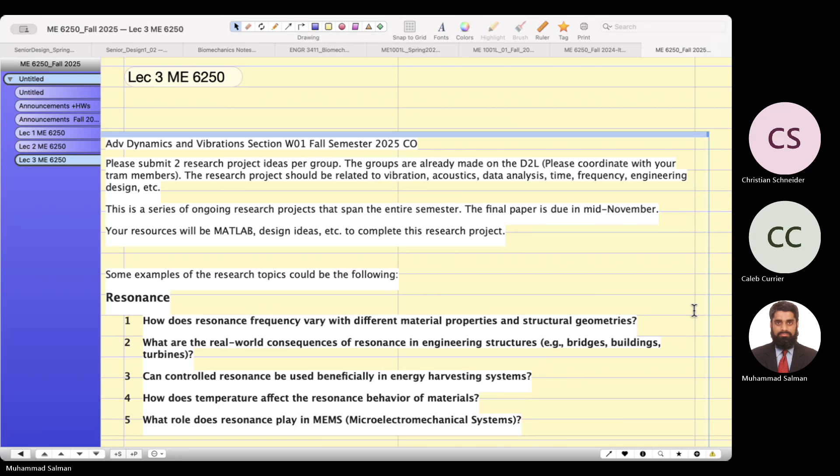So you have to come up with two research ideas per group. I have already made the groups on the D2L, so you should coordinate with your team members. The research project should be related to vibration, acoustics, data analysis, time, frequency, engineering, design, etc. It's a series of ongoing research projects that span the entire semester. The final paper is due mid-November.

This is the beginning of the research project. This first assignment is the start of all the coming assignments. In this first assignment, you will select a project. I gave some examples which are closely related to what other students did in the past.

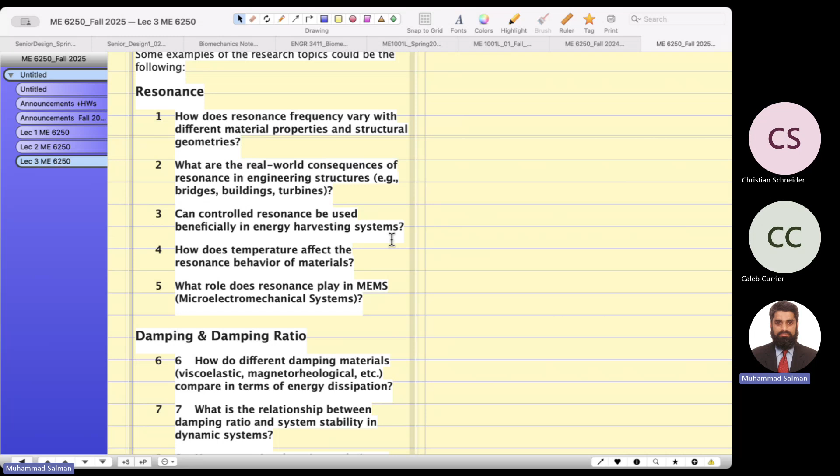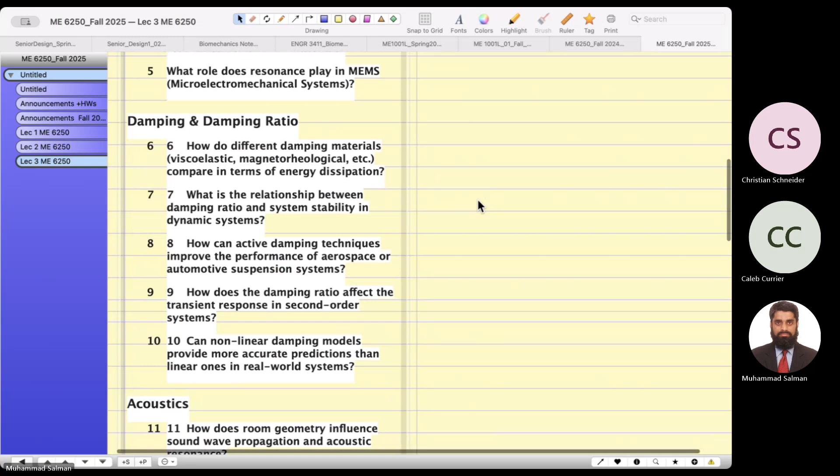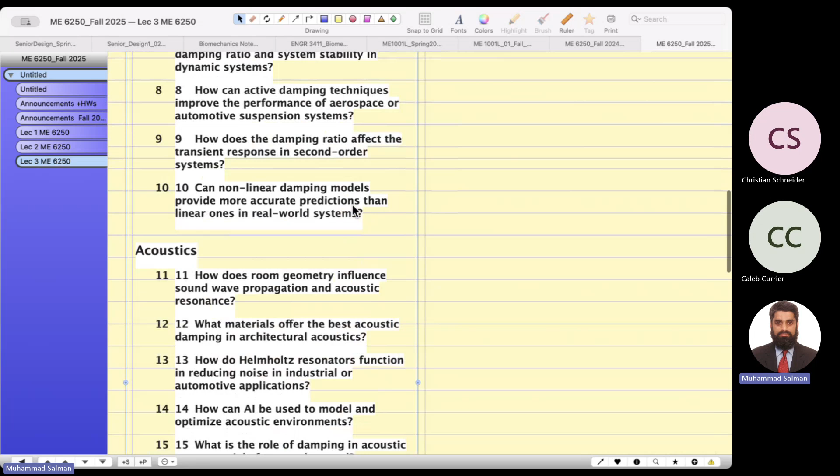For example, resonance: how does resonance frequency vary with different material properties and structural geometries? And damping ratio. Actually these are not two numbers, just one number. Somehow the software is automatically giving another. But acoustics, vibration analysis...

So I would suggest you go home and talk to your team members about which selection you prefer. You might have your own idea too, you have freedom to choose which paper you want to work on. Can you do that at home this week, and coordinate with your team? I think you are working together with another guy.

He's not here for some reason, but you three are working together. I have made a group of students. Can you see this on D2L, that you are grouped together? So you can see it on the D2L.

No, can you see it? If you go to the D2L... I think under 'others' you see the groups. Can you go there? Do you see the tab called 'Other' and the groups? So you found your group members there.

Okay, now it's not difficult. You come up with two ideas and we will discuss together. But I would suggest, when you submit this homework, give like a 90% weightage to idea number one and 80% weightage to idea number two -- this will be your preference. Then I'll give you my feedback, because with 4 months, or really 3.5 months left, that's the time span. I want you to select a project which is not too difficult and not too easy, so it covers the whole semester easily.

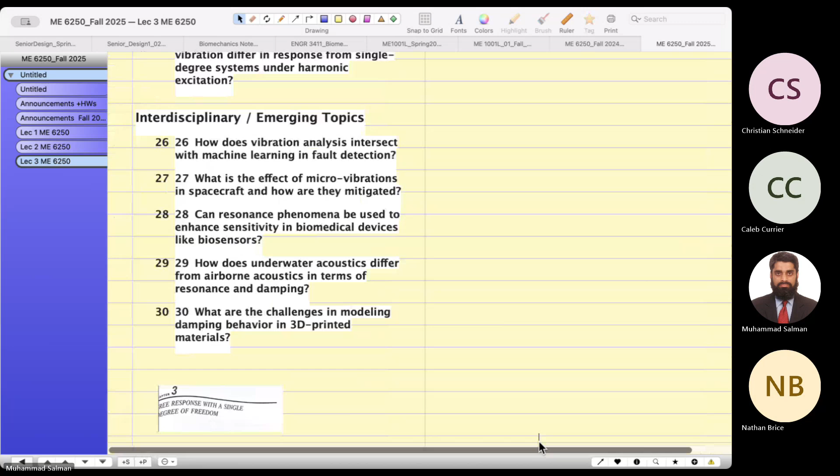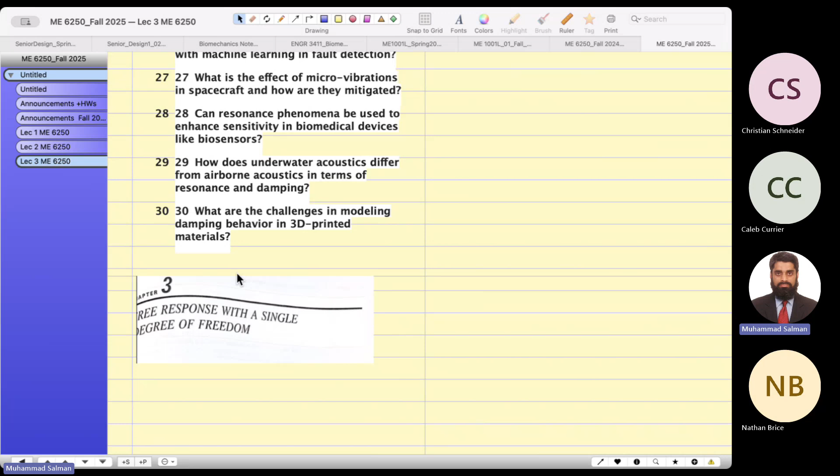Free response with a single degree of freedom. We will study multiple degrees of freedom later down the road, but today we will study the single degree of freedom.

Okay, I'm giving some examples. Let's start from the... project outline, the chapter outline is here. First order response -- let me give you an example.

If you see a problem, a physical system, how do you go from a physical system to mathematical equations? Let me give you one example.

Suppose this is a block of mass, and this is on a table. It has friction, so force. When this is a block of mass and you apply a force in this direction, what will happen? It will start moving to the right, and there is friction, which we call the damping coefficient. Friction is known as the damping coefficient.

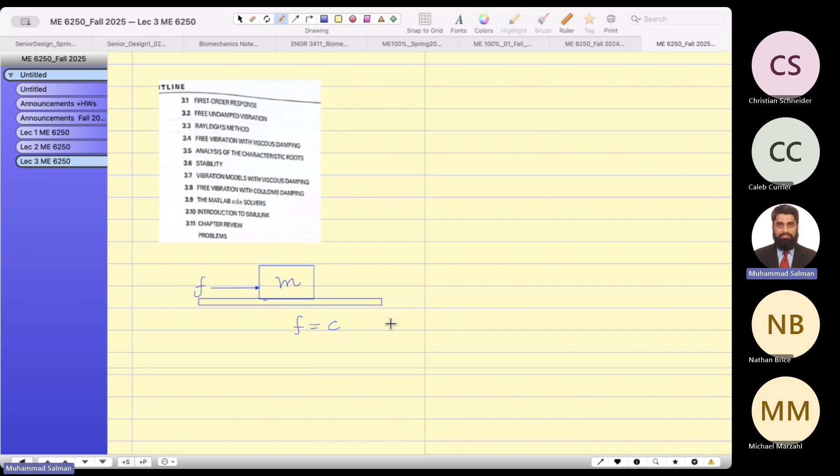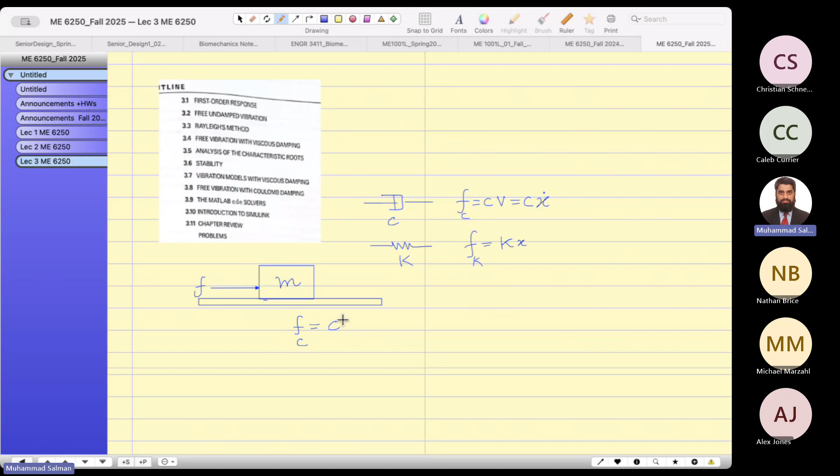Agreed? So what I'm going to show you is that the friction force due to damping acts like viscous damping. Agreed? So let me write it like this: cv. For the moment, let's write it in terms of variable v. So now it's moving in this direction.

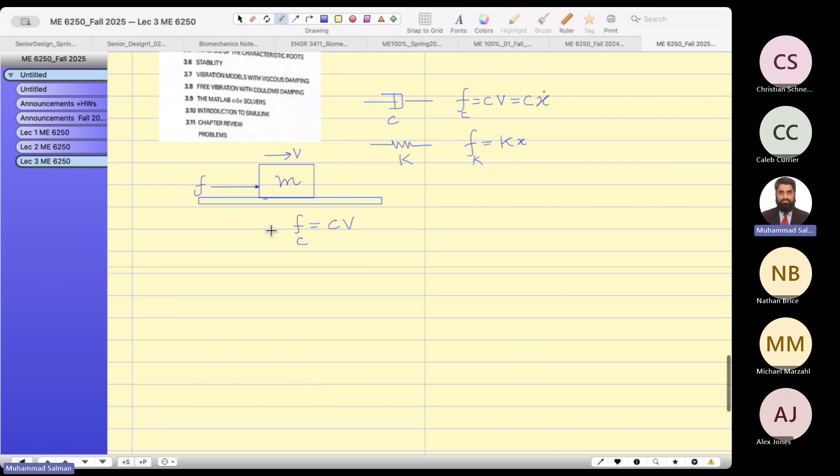Now, Newton's second law. When you are deriving the equation of motion, you start with Newton's second law, which states all the forces on the left hand side are equal to mass times acceleration. So mass times acceleration -- since it's in terms of variable velocity, can I write it down like this?

Now on the left hand side, I'm going to show you. This is my positive direction, because I'm assuming that my right coordinate is positive. X to the right is positive.

Now let me show you the direction of the damping force. Would it be in the direction of motion or opposite to the direction of motion? Opposite, because it is resistance. Viscous damping is resisting, so I can write down a negative c.

Why am I writing this? Because it is opposite. So this is applied force minus friction force equals to mass times acceleration. You see my point, guys?

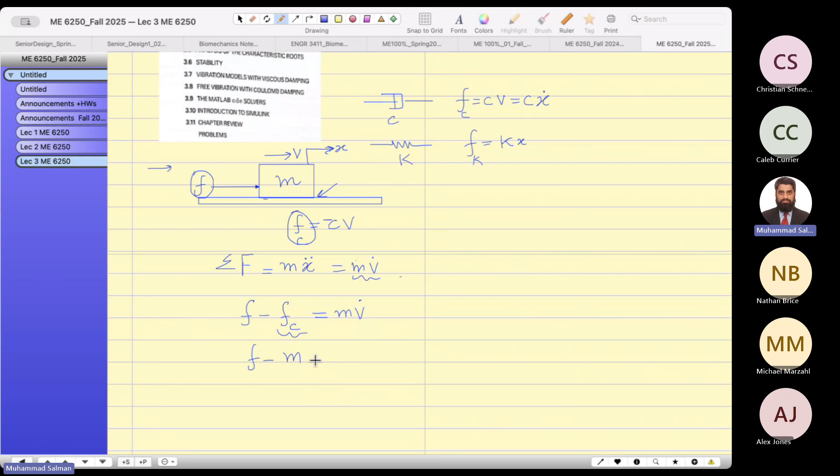Now if I rearrange everything, can I write down like this? M... let me write the first step, then I will show you. Can I plug in this formula in place of F sub C? I can do that: F minus C times V equals to mv dot.

Now if I rearrange it, I can rewrite here the acceleration term, the first order derivative, velocity term, and then equals force. So it is the differential equation of motion, first order.

Now, according to our knowledge which we already possess, we know there's a standard form in the first order equation. Let me write down the standard form here. Standard form of first order differential equation of motion: time constant times... some constant here. So maybe I can write down here just like this.

And the coefficient for this velocity, the second term, is 1. This coefficient is 1, and this is known as the time constant.

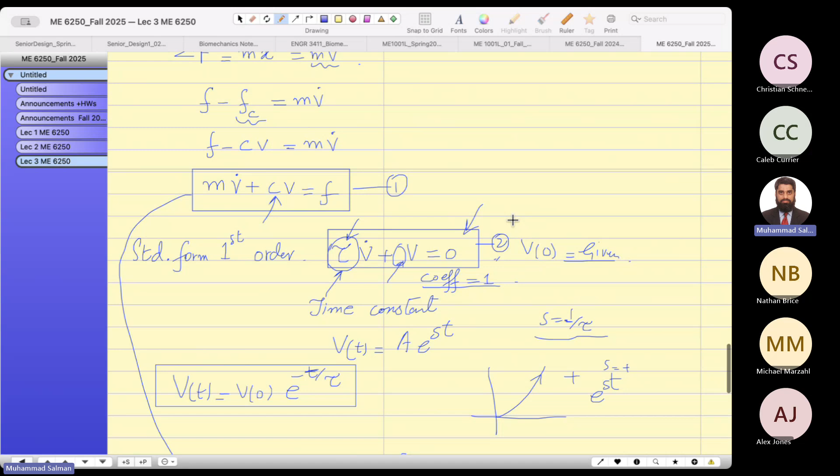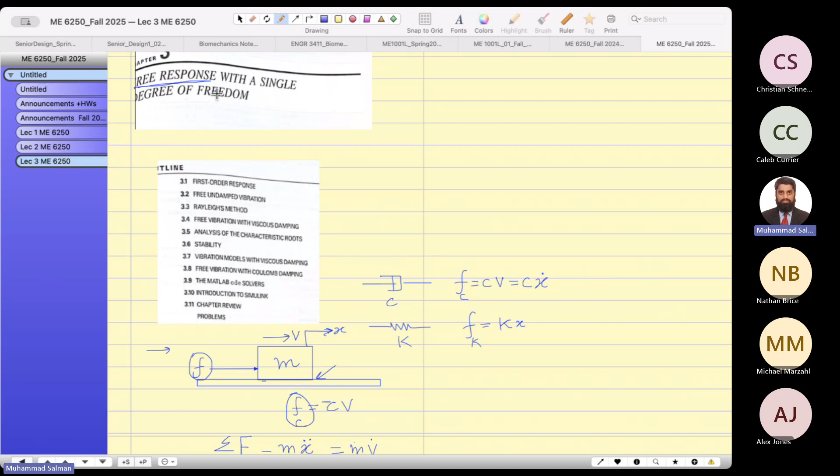Now on the right hand side, this is a force response. You see the standard homogeneous equation, which says the right hand side is a free response because our focus is on the free response. We will study the forced response later. You have to make the right hand side equal to 0 in order to apply this solution. This solution is only applicable when the right hand side equals 0.

If it is not 0, it's known as steady state response, which you will study later. Steady state response is different than the free response. Free response is where the right hand side is 0, you just give initial condition. That's why I wrote down V sub 0.

Suppose you move a spring, the mass up until like 1 centimeter, and just leave it, it will start to come back, oscillate, and stay there. So it's a free response, and we can apply the equation.

So let me write down this equation like this. Can I apply this? Velocity equals to V sub 0, or V0, times e to the, what is the time constant? The coefficient of velocity dot, the first order term, that is the time constant. So can I write down T over M over C? And if you rewrite M over C, can I write down e to the negative C over M times T?

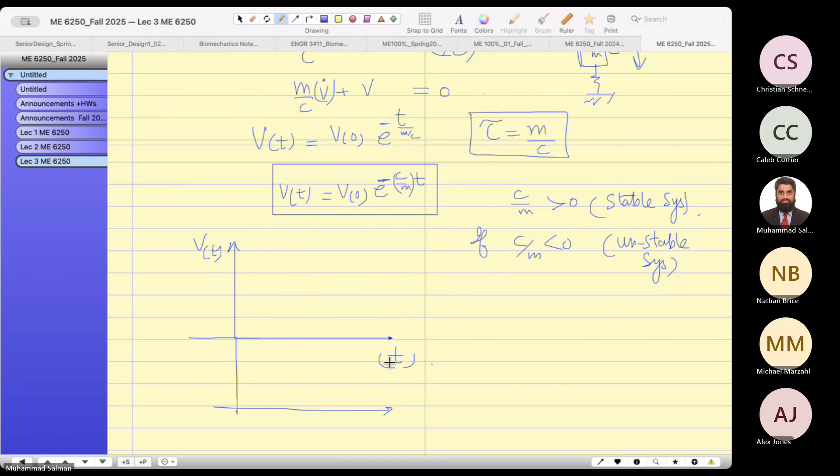And how do you draw the unstable system? Let me show you graphically. Over here, velocity here and time here. I'm gonna draw two plots. This is graph number 1, and this is graph number 2.

Graph number 1. Which one is a stable graph? Number 2.

You remember in the last lecture, I talked about the constant. I drew this plot to show you the time if the system comes to 0 position. If you give initial condition, maybe 10 meters or 10 meters per second velocity to some motor, whatever it is, it comes to rest after some time.

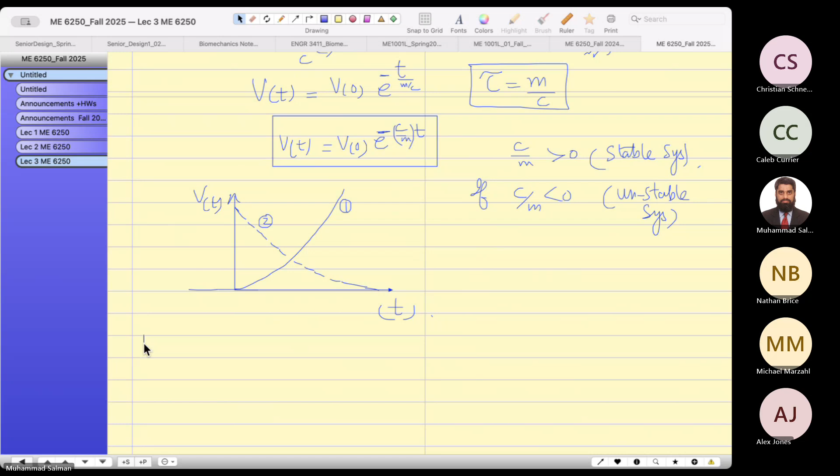We will come back to chapter 2 later. I want to finish a little bit of the vibrations and come back to dynamics a little later.

So look, have you understood this plot? You just have to graphically understand it. This is growing exponentially, it's unstable. And when C over M is 0, it's a constant value. And when it's greater than 0, positive, it comes back to the mean position.

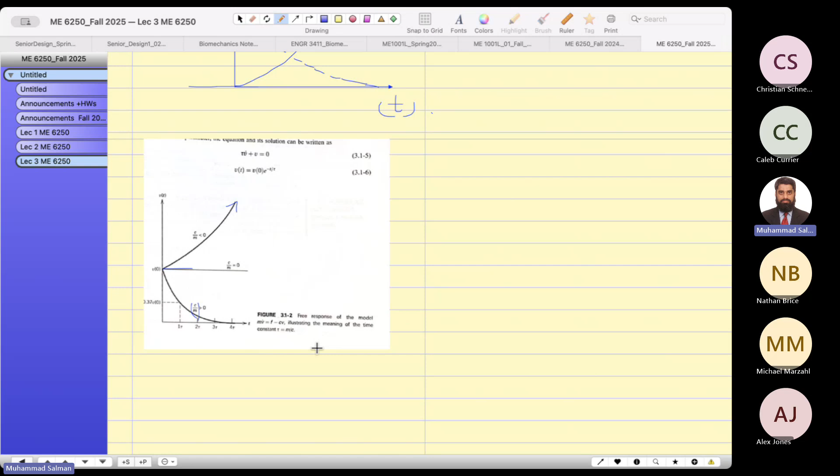I want to show you one more thing: if you take this equation of motion, which is this one.

Do you know, I think there is a Laplace transform table. Do you know about Laplace transform? Laplace table, form sheet.

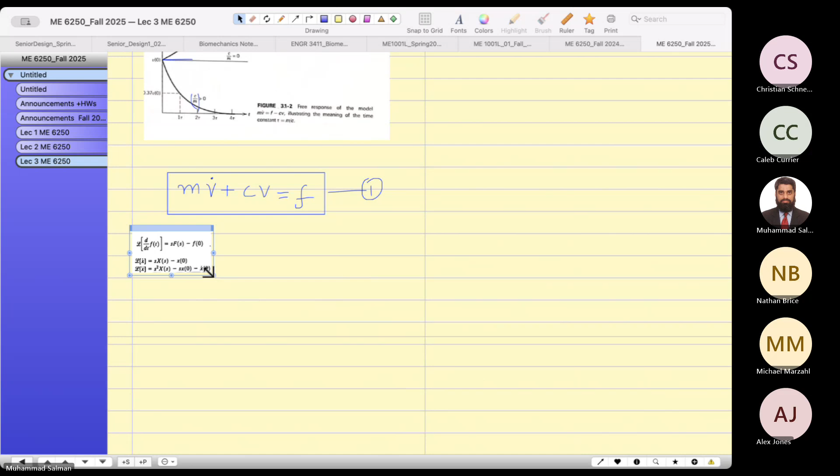This is the Laplace transform of the first order derivative, and the second order derivative. You will study this Laplace transform in detail in chapter 5.

Look, this is the model. And I explained that when you are dragging a mass, it creates some friction that is a negative damping coefficient. So that's why I'm drawing that in the form of an equation.

Now look, over here, I want to apply this, the Laplace transform, keeping the right hand side as 0. And what is the Laplace transform? Initial conditions are assumed. I'll show you the initial condition in a bit.

This is MS. Can I write MS, big V, S domain, C, big V, S? So then you have this initial condition. For this one, I can write down negative initial condition as written like this. Now look over here, so V of S in the S domain is outside the parentheses, MS plus C.

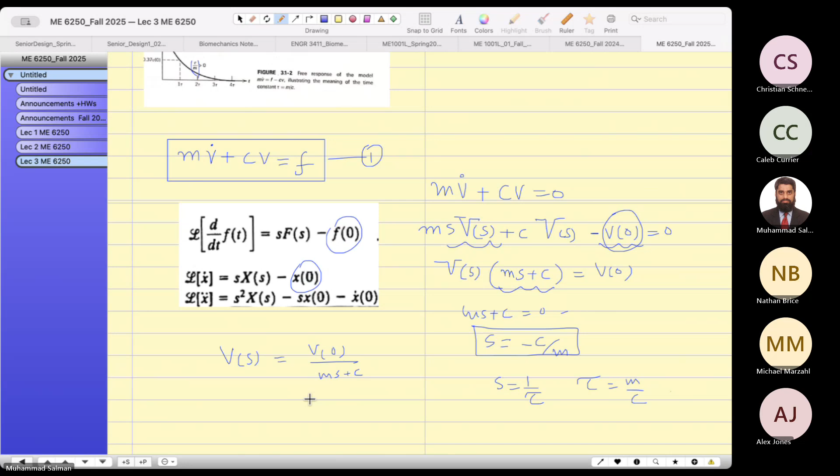So V of S... yes. Look, this is already there. This is the initial condition. It's there because I just added the big V's together. So now, look, can I write down here like this? V sub 0, V of 0, M is outside, S plus C over M.

So now if you take the inverse Laplace, V of t equals V of 0, e to the negative C over M t.

Because we know that the inverse Laplace transform of this term equals e to the negative at. You might have studied this earlier, but you can revise it. Whatever method you use, you get the same answer.

So let me show you one question. Let's do one question together. I think this is our...

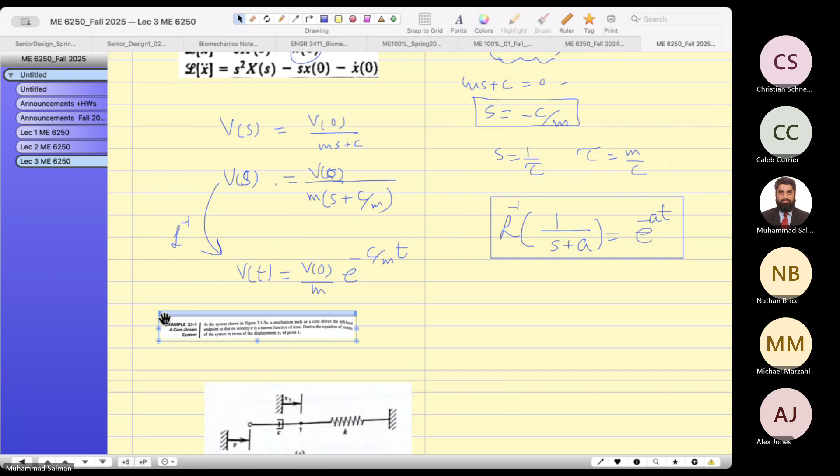In the figure 3.1-3a, by the way, this is figure 3.1-3a. Okay.

Mechanisms such as a cam drive the left hand endpoint. So this is the endpoint and it keeps going forward and backward as a function of time. Derive the equation of motion of the system in terms of the displacement x1.

So we have to derive. Does it say to find the solution? Okay, we will find the solution. I will find out what is the solution of this derivative. So let's do it together.

Okay, this is when you see such a sign in many example problems, you will see this. It is nothing but the displacement degree of freedom. This node is moving with a displacement, the coordinate is x1. It's starting from 0, and at this moment going to the right will be positive. And this is another degree of freedom.

So some books don't put it this way, some books write it on top and say degree 1, and this is degree 2. So it depends, it's not a big deal whether you write it this way or the other way, but these are the degrees of freedom, or the generalized coordinates.

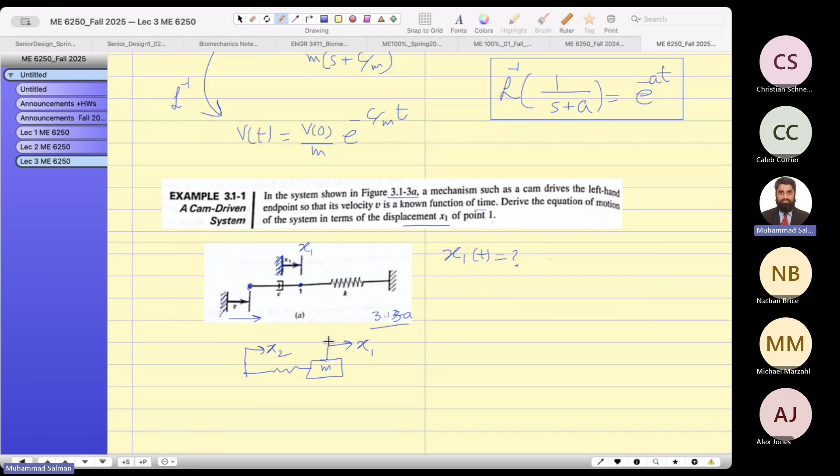You will also study generalized coordinates, which completely define the motion of the system, later down the road. So let me show you. I want to show you what the equation of motion is.

So can I take this node, which has this motion to the right? It's a nodal mass, meaning mass is 0. Then the spring will exert, push this to the left. So what is the force due to the spring?

Minus kx. And when this node moves to the right, the damper will also bring it to the left. And the damping force is c times...

Now here comes the trick part. Look, this end is moving, and this end is also moving. So how will you find the net velocity? You have to find the difference.

So the way I will do it: I will take the coordinate which is for the nodal coordinate, the mass coordinate, and write that down first to be consistent. In future, when considering the mass, you should write down its coordinate first. So what is the coordinate of the nodal mass? X1. So what is the velocity? X1 dot will come first, then comes the other end's velocity.

What is the velocity given in the question? V, it's the symbolic expression. Can I write down negative V? So this is the, and negative sign — why do I write down a negative sign? Because my coordinate is positive to the right.

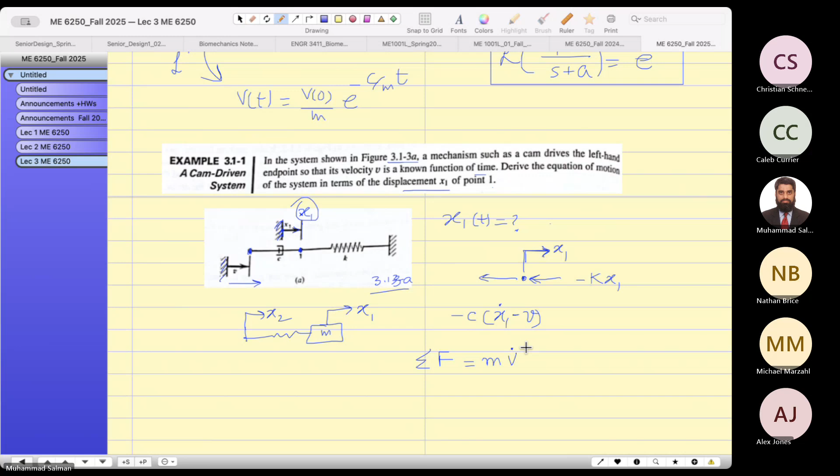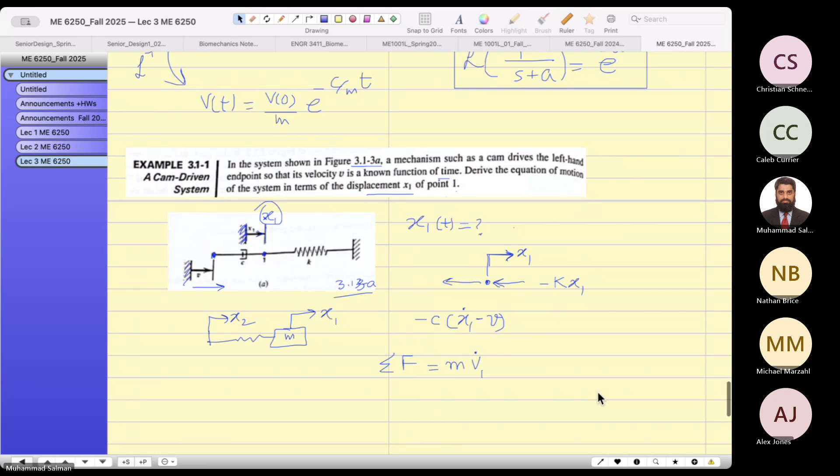Can I write down the equation of motion? All the forces are equal to mass times acceleration. Yes. Velocity of the other end of this end.

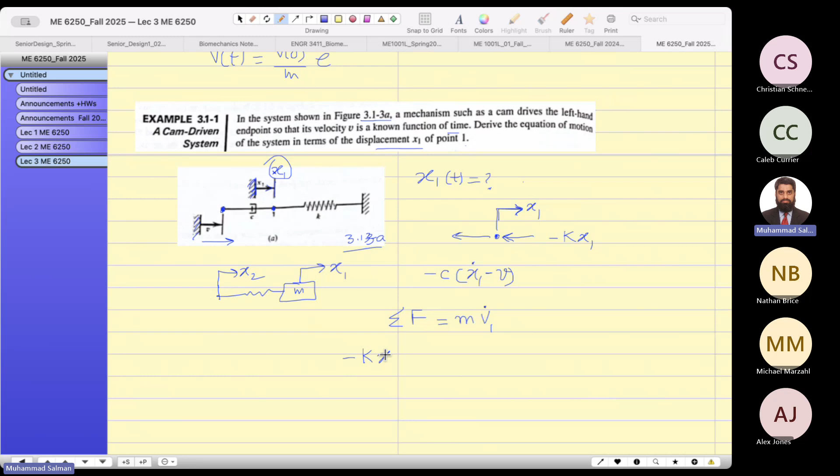Okay, so look, can I write down like this? Minus kx1, this is my C. Now, guys, the right hand side is the mass, but do we have the mass of this node? No, we don't. So can I write down equals to 0? Because this is the nodal mass.

So I'm interested in, let me show you this standard form. Let me show you this standard form here, tau. Okay guys, so over here I want to bring my whole equation into this form, and then apply the formula. Look, how can you help me — let's do it together, okay?

Can I write down here: negative cx1 dot minus kx1 plus cv equals to 0? And when I bring this to the right hand side, this becomes negative c.

I just rearranged this one so the negative is cancelled out because it is distributed in every term. So now what else? How can you make this positive? Sorry, how can you make it 1? Divide the whole equation by letter k.

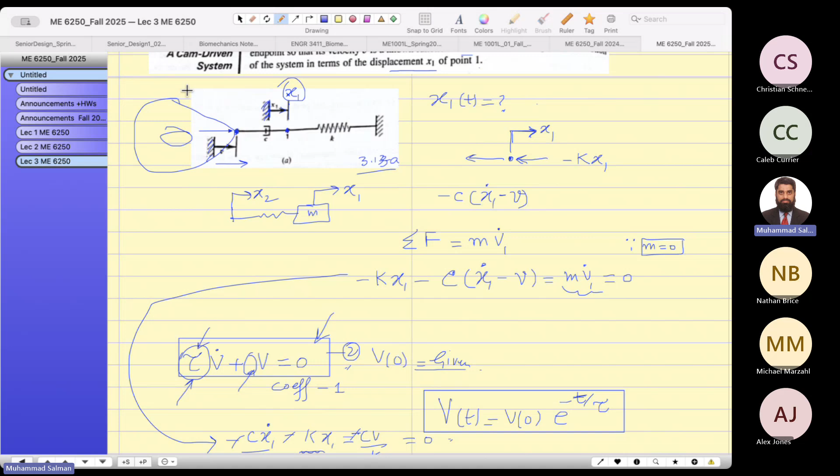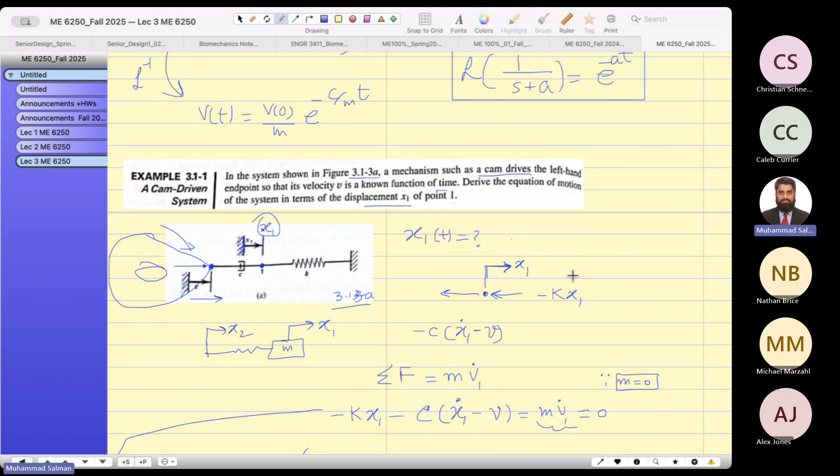You have a question? Yes. Yeah, this is a good question. Look over here, this is the point. So maybe it may be like a big cam — we don't know. Usually the big cam keeps on rotating and keeps on pushing the damper forward and backward. It's a cam operated system. Mechanisms such as a cam drive the left hand side, and when you push the left hand side, the right hand side also moves.

So you will study this. If I were you, I would look closely at the statement of the problem and try to understand, collect the data from there, and then find out the answer. So let's do one more problem, then I will move to the next topic.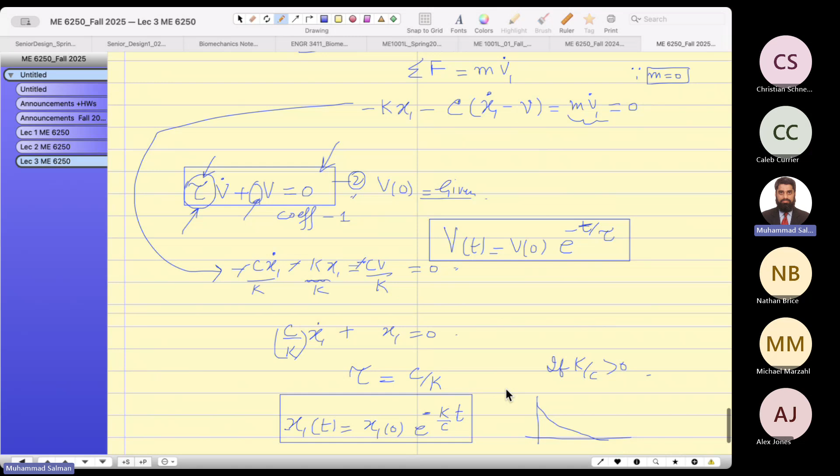There is just one damper, so the other one is spring. The other end is also moving. X, X1, yes, X1 is also moving to the right. Okay, now we have to take the net velocity. Okay, let's do one more problem here.

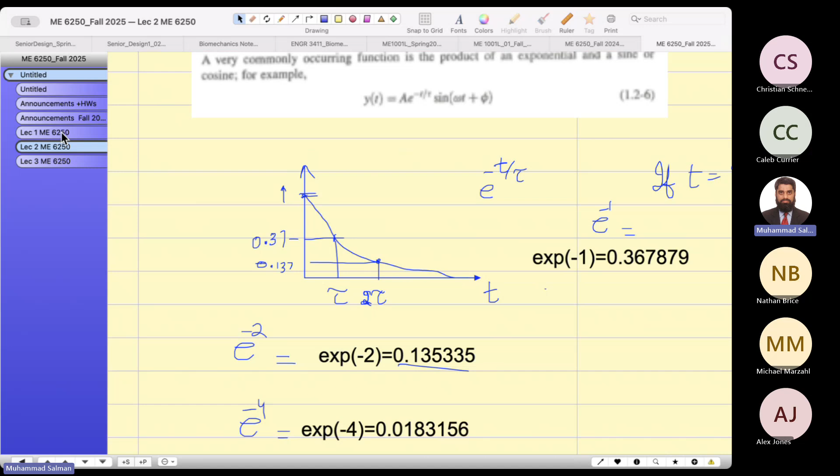Please come up with two design ideas, and then we will refine it, and I will give you my feedback. We will select out of those two as a team, working as a team. Just two ideas per team is not difficult.

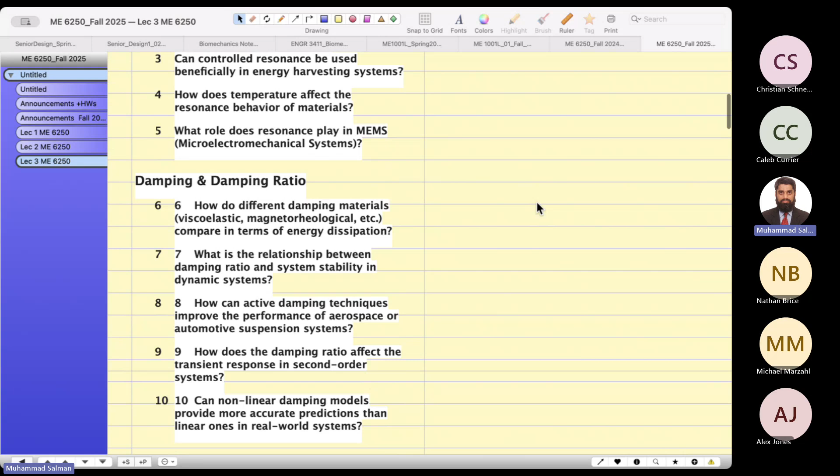I mentioned, I gave you a lot of examples of the project ideas, and try to select one in which you can use MATLAB, because MATLAB is a tool which at this stage you should know how to do simulation in. Just plug in the theory, find out the answer.

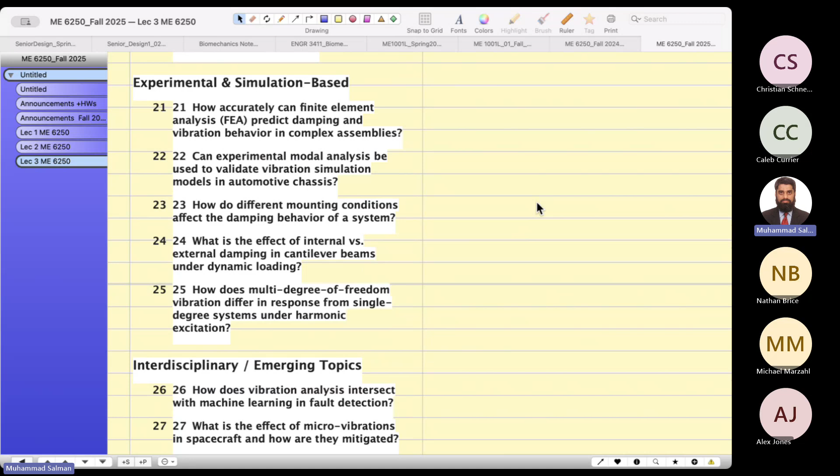Okay, let's do the next question. I want to go ahead and solve this one for you. The good thing is that MATLAB is available for our students, included in your package.

Okay, this is the first order equation of motion. Let's do one problem here very quickly because it's not difficult. Let's obtain the free response of the following models and determine the time constant.

Let's do the first question: 8y dot plus 7y equals 0, and the initial condition is given. The standard equation is tau y dot plus y equals 0, where y of 0 is the initial condition, and y of t equals y of 0 times e to the negative t over tau. This is the solution.

So first, I would divide the whole equation by what? By 7. You see, we have to match our actual equation with the standard equation. This standard equation does not have the coefficient of y, which is just 1 - it has, but it is 1. So can I write 8 over 7 y dot plus y equals 0?

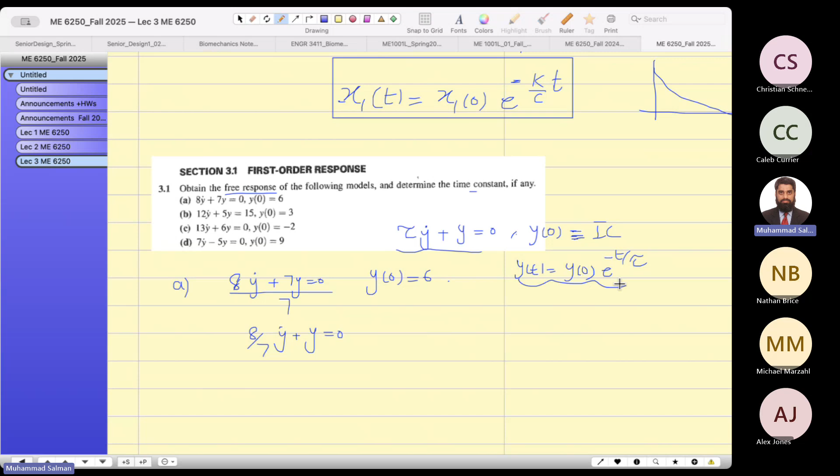Now just use this equation: y of t equals y sub 0 times e to the negative t over tau, where tau is 8 over 7. Agreed? So if I rearrange this, can I write it as 6 e to the negative 7 over 8 t? This is your answer - a one line answer.

So for free response, whenever you see the right hand side is 0, it's a homogeneous equation known as a free response, meaning it's not a steady state response. So let's do one more problem.

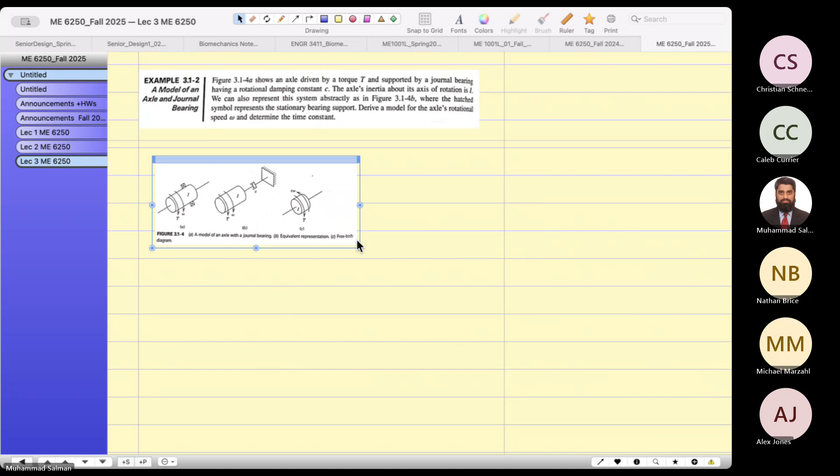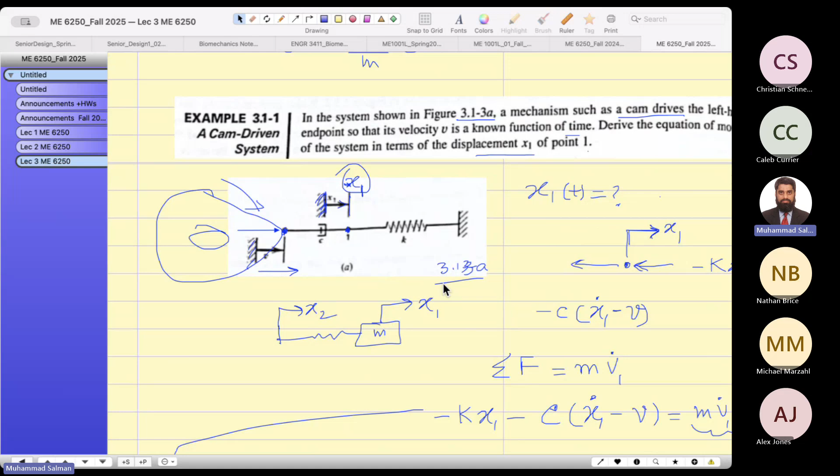Now this is rotational motion. We studied about translational motion earlier. Now we are moving towards rotational motion. So what is Newton's second law in rotational motion?

Let me show you. Newton's second law states that all the moments, all the torques, are equal to mass moment of inertia times omega dot, or alpha. Some books write alpha, some books write x double dot - they are the same thing. Alpha is the angular acceleration, x double dot is angular acceleration - I'm sorry, this is not x double dot, this is theta double dot.

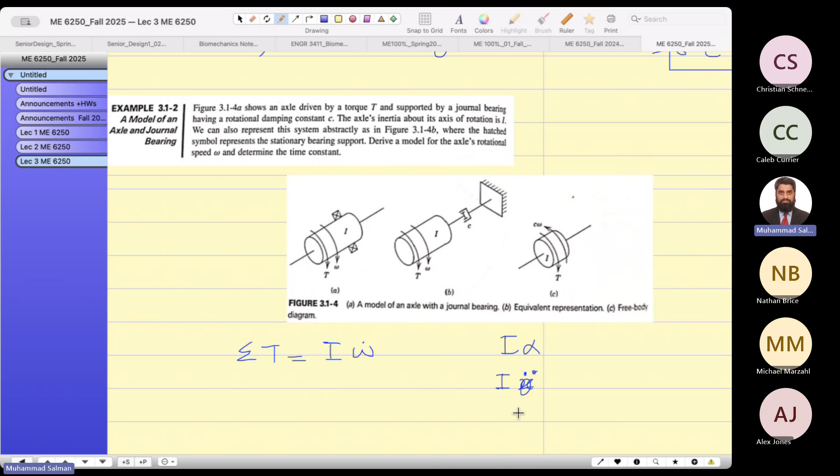In angular rotation, x is replaced by theta. You see? So correct me if I make a mistake - you can correct your professor. Okay, let's do it together.

So the question states: an axle driven by a torque T. This torque is being applied and supported by the journal bearing, and the bearings have friction. Journal bearings have a rotational damping coefficient C - the symbol of damping coefficient is C. And the axle's inertia about its axis of rotation is I.

This I is given - it is the inertia, mass moment of inertia, which is mk squared, radius of gyration times the mass, or if it is a pendulum, you can calculate it as r squared dm or mr squared. We will talk about it later, but I'm just reviewing how you find the mass moment of inertia of a rotational motion. R is the distance.

So we can represent this system abstractly with the hatched symbols. Okay, derive the model equation of motion. Now can you tell me if you plug in? Look here - this third figure is the free body diagram.

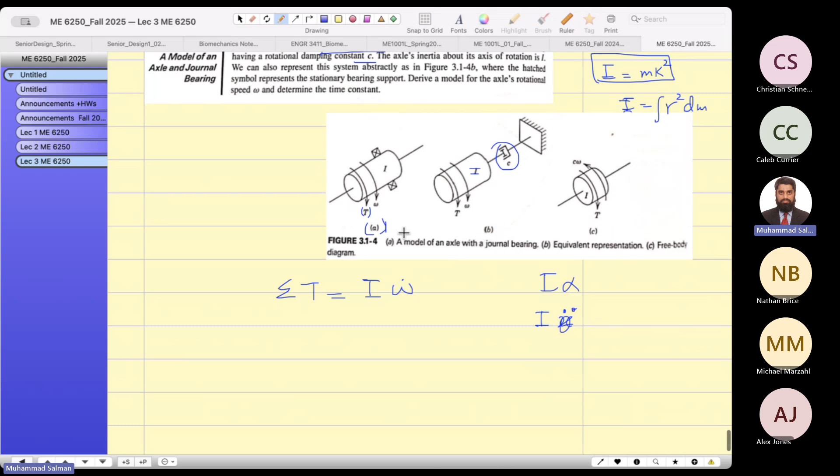It's a free body torque. Applied torque is positive. Do you see the resistive torque? I would say negative. The book takes the magnitude, but I'm taking algebraic magnitude because on the left hand side I have to do this, since applied torque is clockwise and the resistive torque is stopping that move, so it is negative. It is trying to resist the applied torque. That's why it's the journal bearing.

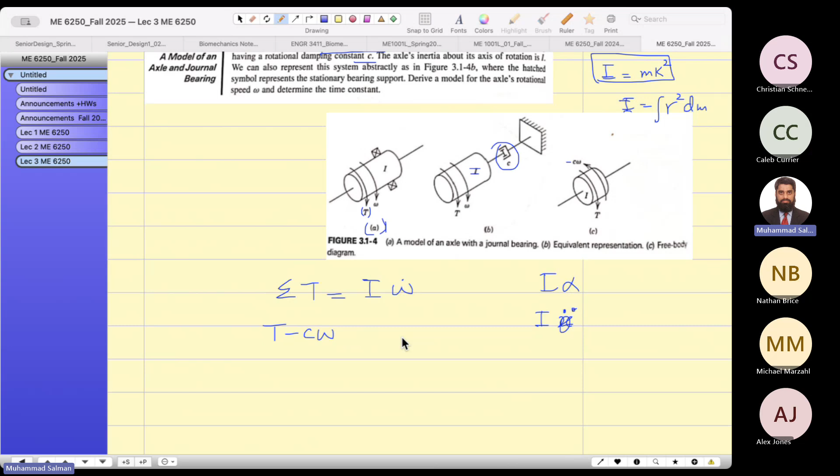You see about the journal bearing, there's a difference between journal bearing and ball bearing. Journal bearing is like a bushing, it has some friction between the contact surfaces. So it's a negative sign. Do you agree with your professor?

Okay, now look, this is the condition. I want to show you for this one, the right hand side. Let's rearrange it. Can I write down the first order first, then the zeroth order like this? Now look at the right hand side for the free response. What is the condition for the free response? The right hand side should be zero, there should be no torque. So can I write it like this?

Yes, it's the same, so you see I can write down like this. I'm going to skip one step since I already solved such questions. You can understand that I made the coefficient of the variable as 1.

Now omega at any time is omega 0 e to the negative t over tau, and tau over here is I over C. So can I write it like omega 0 e to the negative t over I over C.

So if I plot it graphically, look at time 0, the object starts its motion. The shaft starts its motion with a certain angular speed, measured in radians per second. It has some value, and then it goes down with a time constant, which is I over C. And it covers, like over here, about 37%, as I discussed earlier.

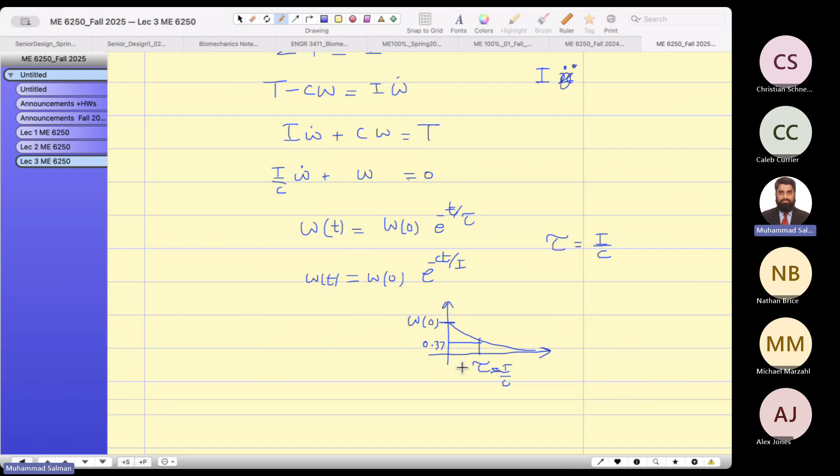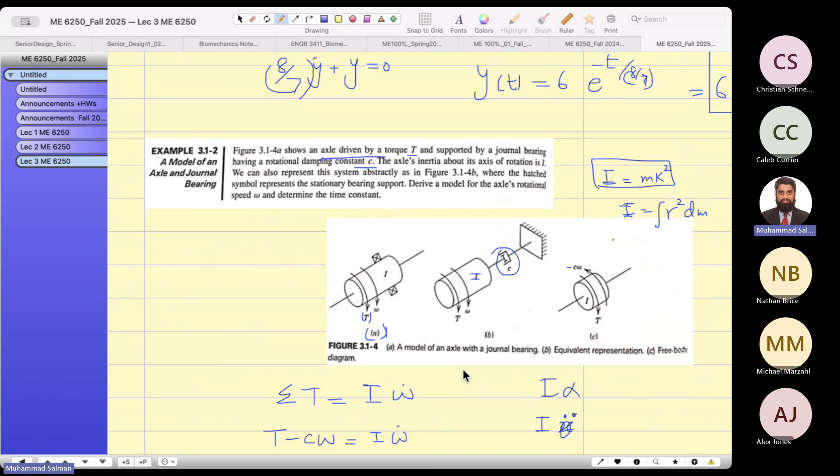So let's move to the next question. Have you understood this question? I've given you the idea how to do the translation, how to find the equation of motion for the rotational motion.

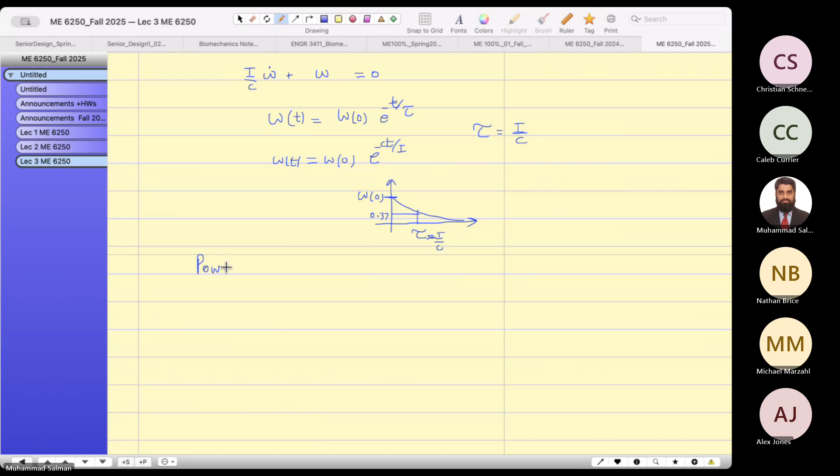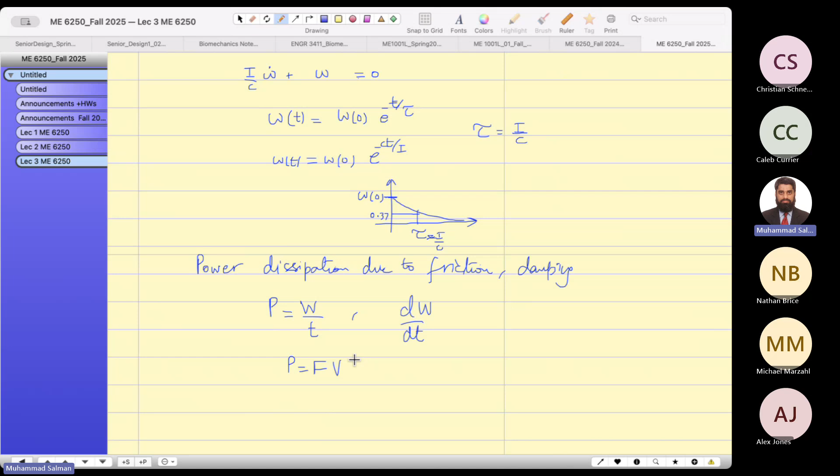So, power dissipation of the damping. In a damper, you have friction, so we lose power. Power is the rate of energy, or for a small time, the rate of energy is power. It can also be written as power equals force times velocity, for the translation motion.

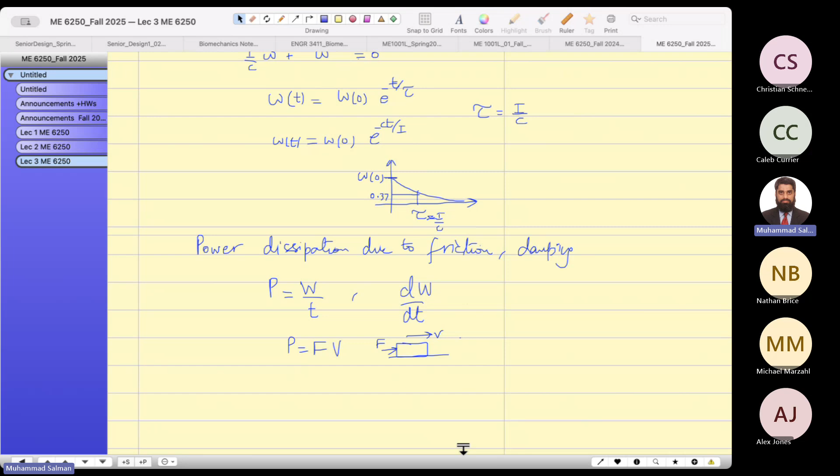Agreed? How about if I have a rotational motion, like if I have a shaft being supplied with a torque and rotating, then the power is torque times omega. For rotational motion, the formula is torque times omega. For translation motion, the power formula is force times velocity. And if you have a resistive torque, it's C omega.

Can I write down the power dissipation for the damper? Look, what is the torque generated by the damper? C omega, right? And can I plug in C omega for the damper? C omega squared. So the power dissipation in the damper is C omega squared. Have you understood?

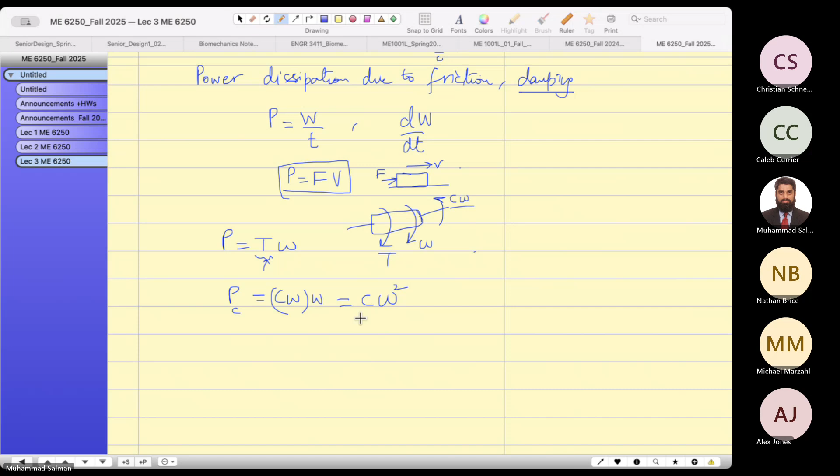Another small concept I want to bring to your notice: if you have two gears meshed together, gear 1 is rotating over here, gear 2 is rotating counterclockwise. The ratio from gear 1 to gear 2 is known as the gear ratio. We know that the velocity at the meshing point, the linear or tangential speed, has the formula V equals R omega. Do you remember this from undergraduate studies? That velocity is the same for both at the meshing point, the contact point.

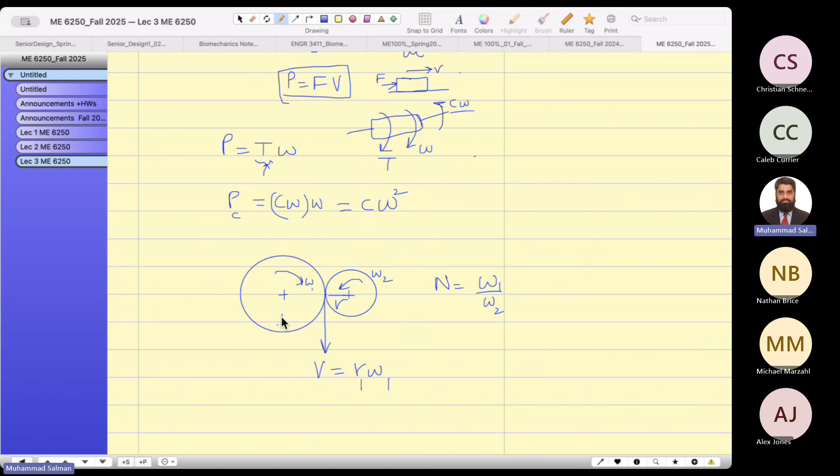So can I write down for R1, this is my gear 1 and this is my gear 2? Can I write it like this? So if I write it like this, what is the gear ratio? Omega 1 over omega 2, or R2 over R1.

Can I write down like this? Similarly, in the book you will study that 1 over n, or n square, 1 over n square, omega 1 square over omega 2 square, omega 2 square over omega. This is just a rearrangement.

So I'm going to show you one question. Let's do one question, it's going to help you derive the equation of motion for the gear train. Okay, let's do one problem here.

Has this homework been released yet on D2L? I'm going to release it today. Okay, thank you. Remind me if your professor forgets, but I will keep it.

Thank you for asking, but let me show you the next question here. By the way, I released another homework regarding the research. I was just doing that part first last night. I was working on that, but I'm going to open this.

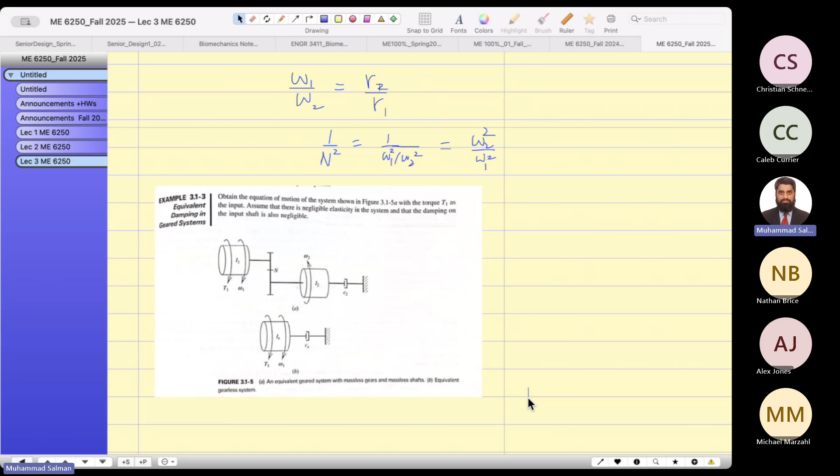Research is a group assignment, but the regular homework is not grouped. Submit as a group, or you can select your leader. I will say this time you will be the submitter, then the next one someone else will be submitting, he will be, she will be.

All right, let's go to the next question. So this is the gear train, and you see one gear is rotating and torque is given here, and you want to derive and obtain the equation of motion of the system with the torque T1 as the input. Assume there is negligible elasticity in the system and that the damping on the input shaft is also negligible.

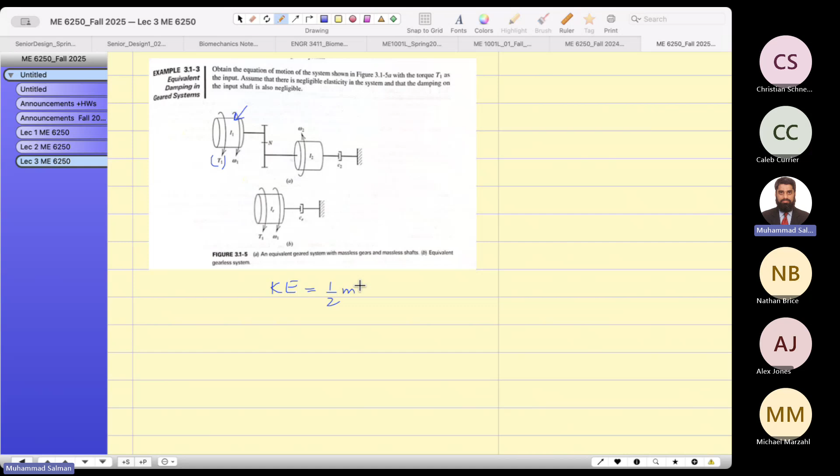In order to solve this question, I want to go to the background a little bit. What is the kinetic energy of the gears when it is rotating? Kinetic energy, let's start from the very beginning. This is for translational motion. But for rotation, like this gear, for rotational kinetic energy, for rotational motion, it is half I omega square.

And I will show you the kinetic energy is given like this, and I equivalent, when you combine these two I's together into this form. Since we did not go over what we call chapter 2, but when you combine these two together, you will see that I equivalent is I1, the mass moment of inertia of this gear 1. And since there is a gear train, sorry, they are meshing the gear teeth, the mass moment of inertia I can write down like this: I2 times omega 2 over omega 1, whole square. Or I can write it as I1 plus I2.

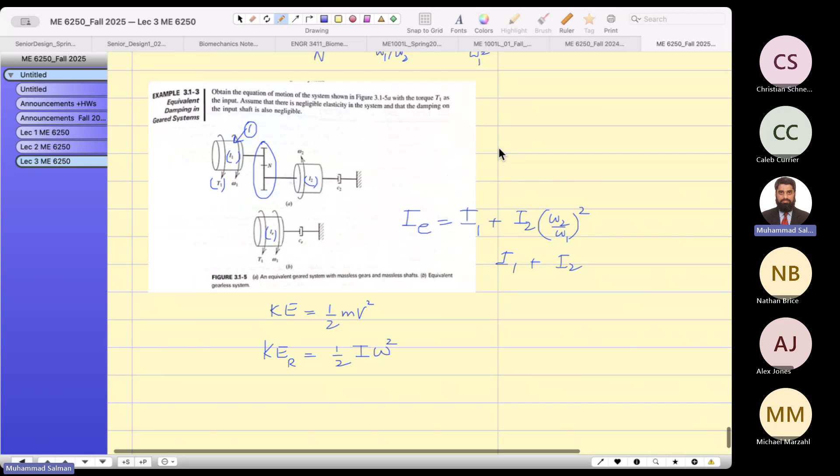Since I know that 1 over n square is like this, can I write down 1 over n square like this? And this is true, since this is a master class, I would leave it to you. How is it equivalent to this one? Can you do it when you go home? I'm trying to reduce it, but I have made a video on YouTube showing how it is equivalent to this one. You can watch it.

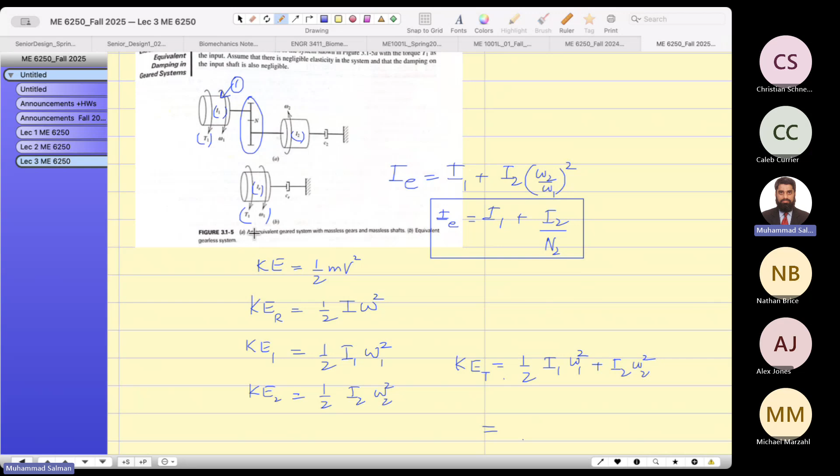Now look over here, I want to reduce it to just the shaft. This is shaft 1, agreed? Torque 1 is being applied to shaft 1. So I want to derive from here. I want to take omega 1 square outside. When I take omega 1 square outside, I'm left with I2 over here.

And what is that? Look, it's the same thing. I just explained it rather than you study by yourself. Have you understood how I got I equivalent? You just take omega 1 and omega 1 square outside, and this is my I equivalent, because I know that the kinetic energy of the equivalent is half I equivalent omega 1 square. Whatever is here, it is I equivalent, and what is that? It is equal to

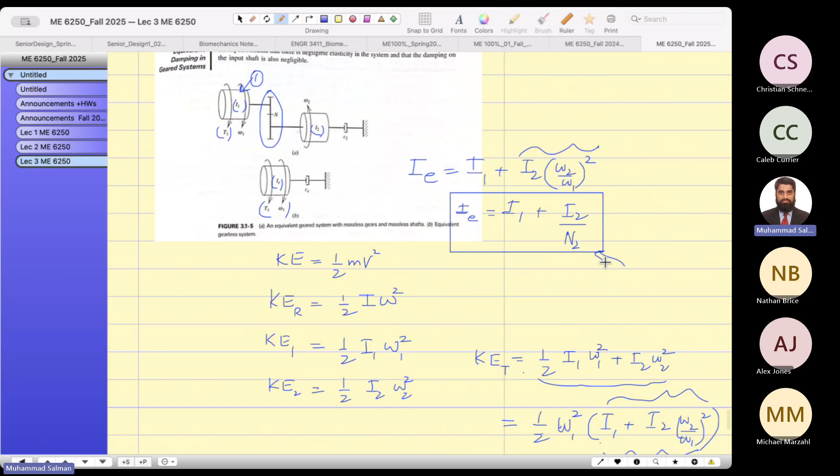I1 and I2 over N2 square. It should be square, I forgot. But have you understood how I wrote it down? Now it's very easy for me to solve this question.

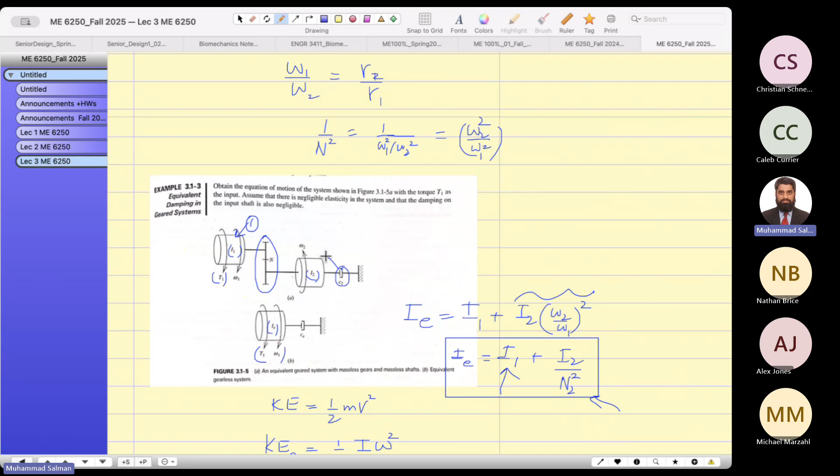One more thing: when you are bringing this damper from the second gear over here, you do the same thing. You have to divide it because P equals C2, I would say, C omega 2 square. This is omega 2 square.

Agreed? But is it C equivalent omega 2? No, it is omega 1. So how can I write C as C equivalent? I can write it like this because I know that C equivalent omega 1 square is equal to C2 omega 2 square. So can I write C equivalent equals C2 omega 2 over omega 1 square? What is this? Omega 2 over omega 1 square is 1 over n square. So I can write C equivalent as C2 over n square.

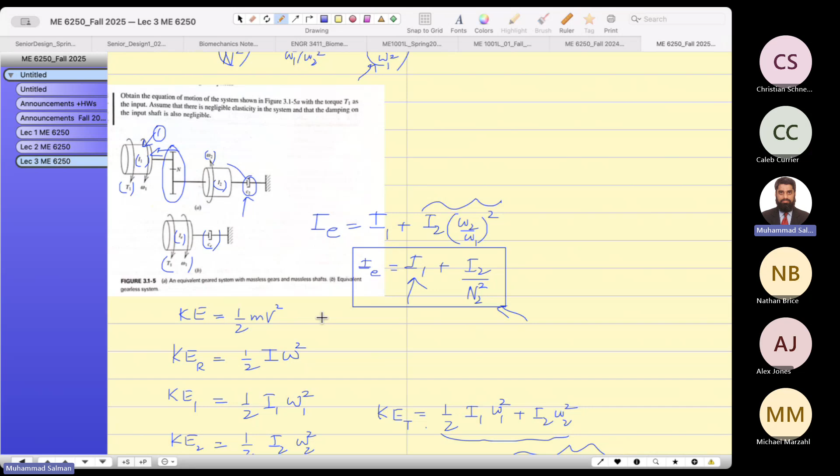Plus, this is plus sign. Oh yeah, you are right, there is a mistake, I forgot, there should be a negative sign. Thank you. So now I have to rearrange it.

Look, the first order term now is the equation of the first order. I'm starting my lecture from the first order, you see, I have made it the first order. So I can make the rotational motion as the first order, translational motion as the first order, and then I can find out the time constant. From here, same story: we just find the time, make the right hand side equal to 0, and then you're left with I equivalent over C equivalent as the time constant. Agreed? And omega 1, so what is the formula? Omega 1 at any time is omega 1 at 0, times e to the negative t over tau. Tau is I equivalent over C equivalent. So that's how you solve this question.